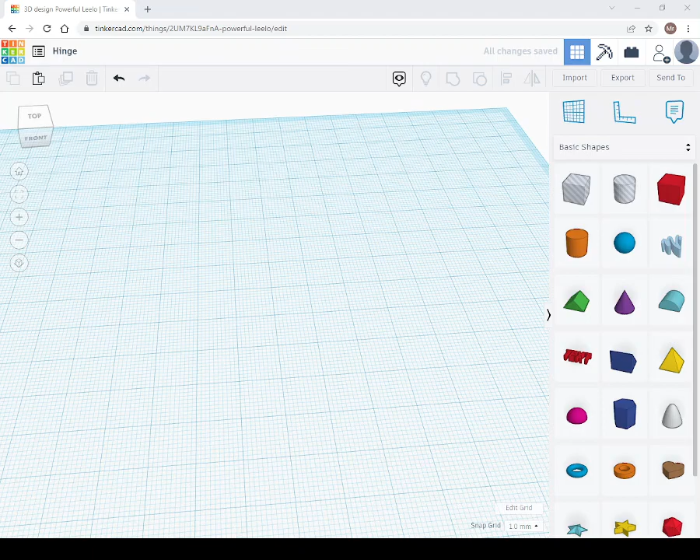Hi there, I'm going to quickly make a hinge mechanism. I haven't done this before, so it's going to be a bit of an adventure for me. I might come across some snags along the way, but we'll see how we do.

So I'm making the height 10, the length 10, the width 10, and I'm going to make this 30.

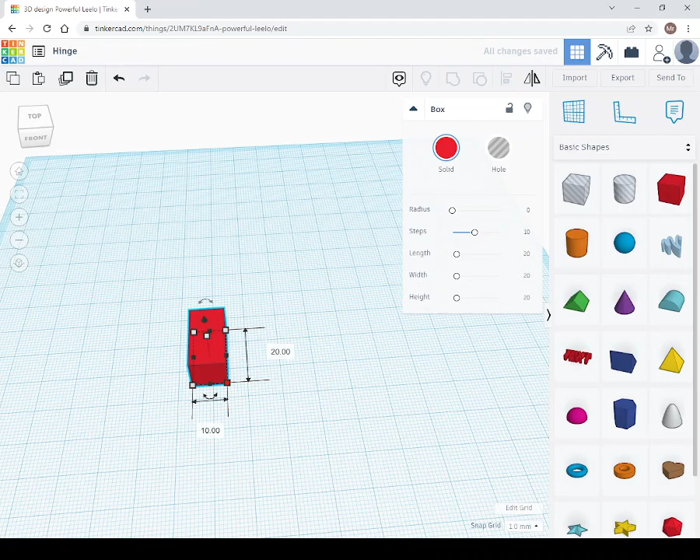Right, so for the barrel part of the hinge, I'm going to make this 30, same length. I'll make this 10 and 10, 10 and 10. Great, okay.

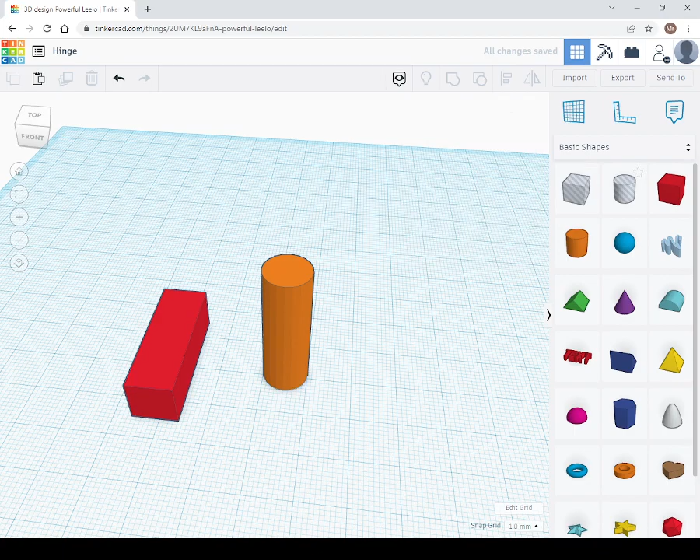Now I'm going to imagine that I've got a pin running through my barrel, which I can draw as well afterwards, but this is going to be 5 by 5, and I'm going to give it a height of 30 again, just to keep things nice and simple.

And what I might do is duplicate this and also have that as a solid, so I can have that as a pin.

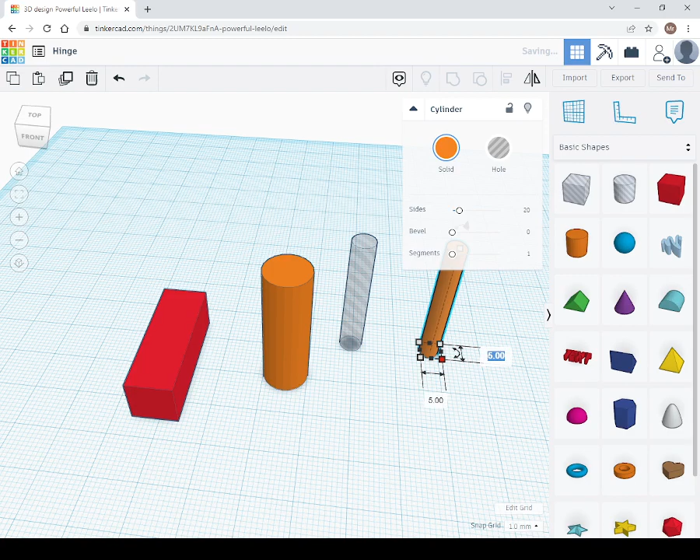Now, as it goes sometimes with the 3D printer, it's a good idea to have things slightly smaller if we do have a pin. I'm going to make that 4 by 4.

We can actually have a pin part that goes on the top. We'll make that also 2, let's see, we'll make that a height of 2. It just goes on the extra.

In actual fact, what we could do is make the height of this one sort of... no, that has to go through the whole thing, so we have to make it that way.

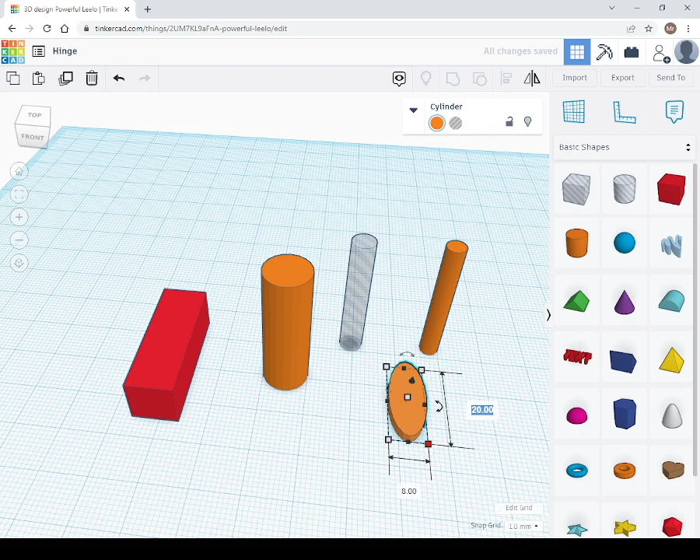I'm going to make this 8 by 8, so it would fit, but you can still see it's slightly smaller than the barrel.

I'm going to move up my pin by 2. There you go. And I'm going to take these both and align them using the align button, and group them, and that's my pin there.

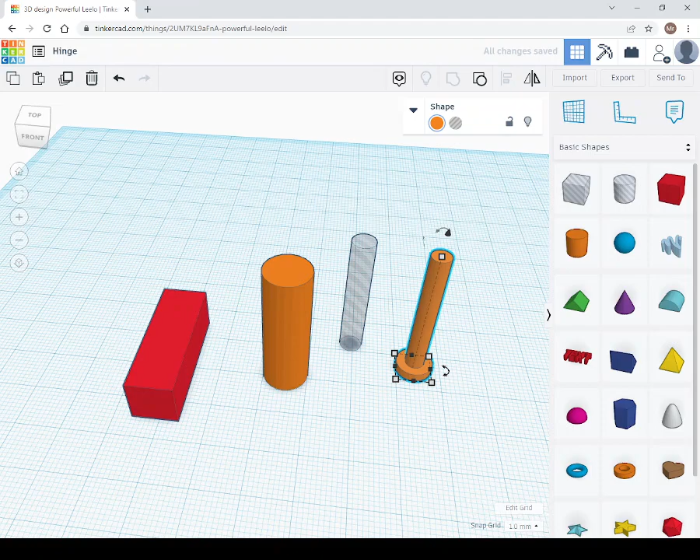So it's actually a little bit smaller than the hole. I'm going to go back to the barrel, and align them. Here we go, that's nicely aligned. I'm going to group them.

Group, okay good. And I'm also going to duplicate this because I'm going to need this. So let's just move this over here. This is kind of our little spare parts area.

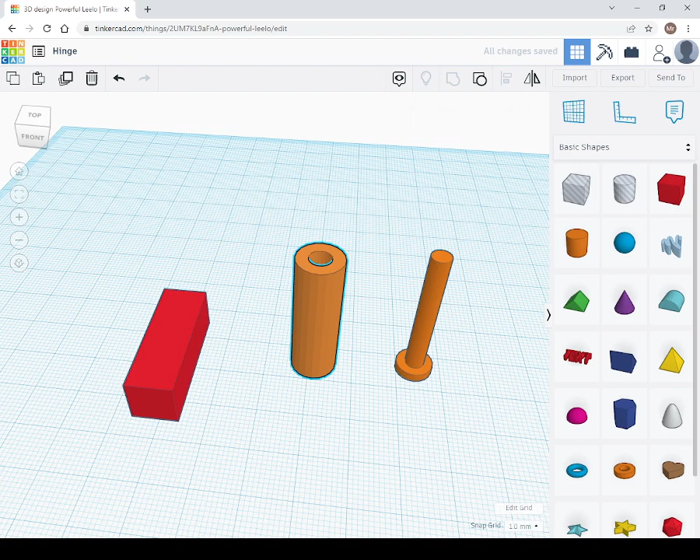Now what I'm going to do is, actually I think I'm going to turn it before I duplicate it. So I'm going to turn this 90 degrees. Let's give this a go. So that's the one I want, so I'm just putting the value.

I'm going to undo that and start again, I think. Let's turn that, well we can turn that like 90, and we'll just turn the other way, that's fine.

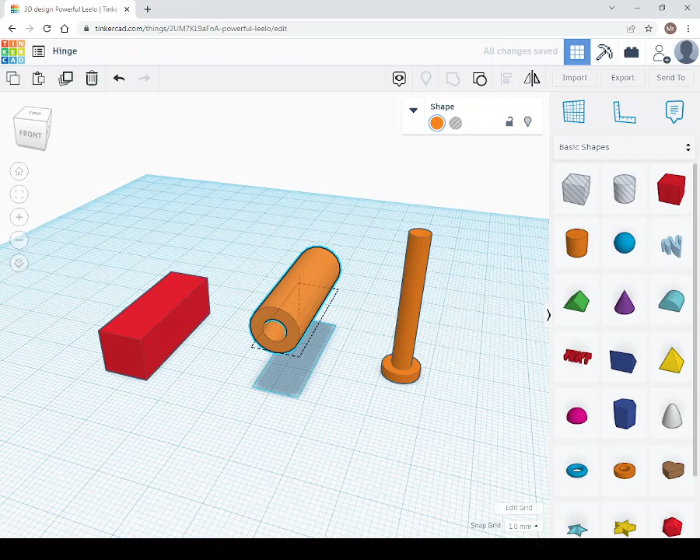So that's good, and let's align these two first. So we're going to make sure... oh actually, yeah, I want to align these first.

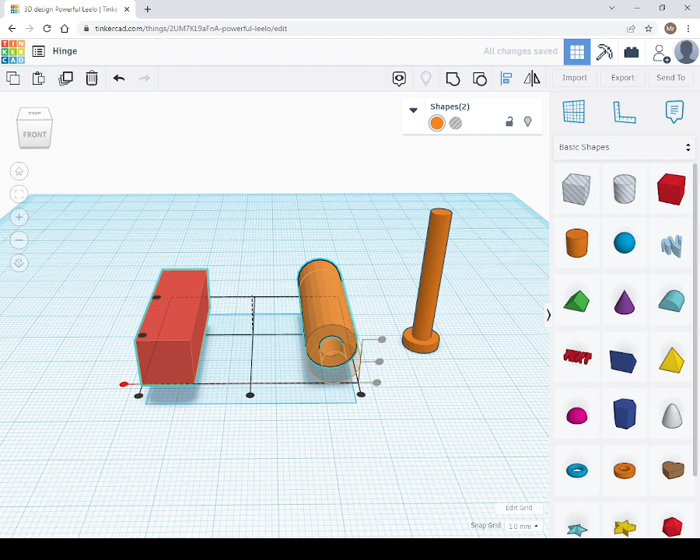I think what I'll do is duplicate the whole thing when I put it together. So let's just get them on the same plane, and get them to the same end, and center them. Okay, and I'm just going to move the whole thing down until it's to 0, so I want everything on the same plane.

And I'm going to take the block, and move it out using the arrow key, using the left arrow key. Keep going. Okay, yeah, I'm pretty happy with that. We'll leave it like that.

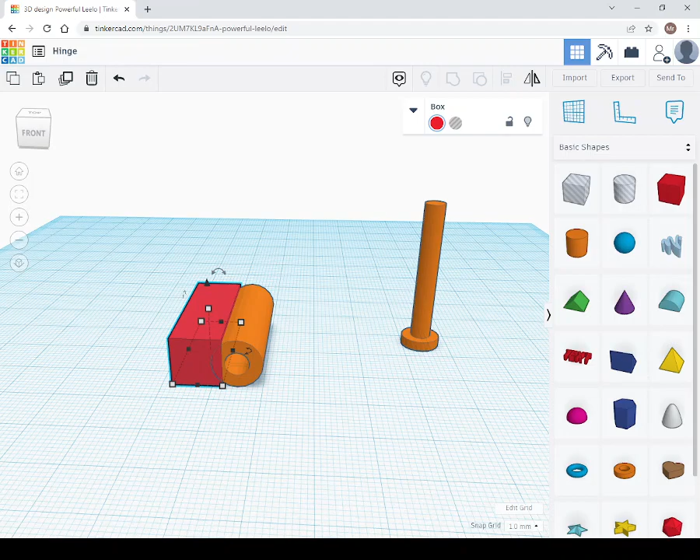And then what I'm going to do is, yeah, we can actually join these two together. But what I'm going to do with this is bring this down and make this 5. Okay, I prefer that actually.

I can play around with this a little bit more to make it a bit prettier, but I'm quite happy with that. So let's just have a look at our distances again, let's have a look.

The whole thing is, so when we group these, let's see what happens. We group these, what's it turn into? What's our distance? So that's 18. So I've moved it across, I've moved it across a little bit extra.

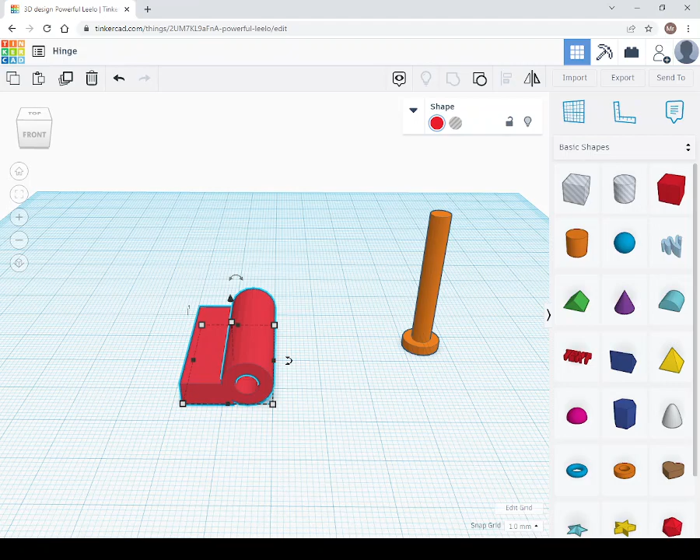So I'm just going to ungroup these, and what I'm going to do is take these two ungrouped and duplicate them. I'm going to move them over here, and use the mirror tool to mirror them. Okay, and you're going to see why I'm going to do this in a moment.

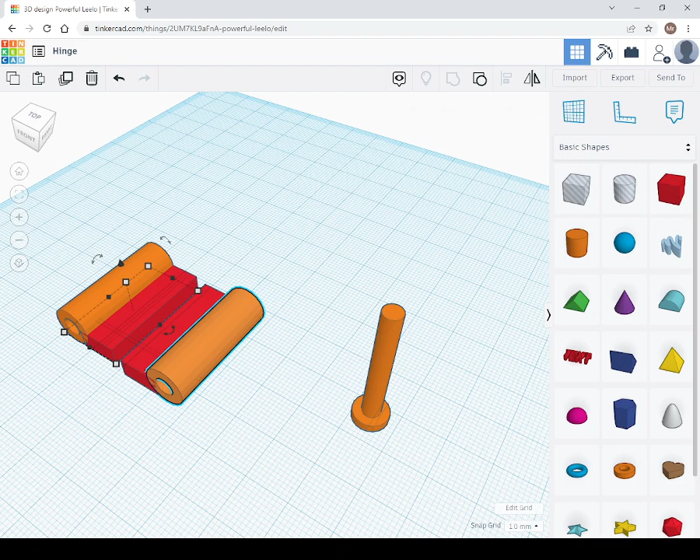Right, okay, so what I want to do with this now is make this a third of the size, so I'm going to make it 10.

Okay, and I'm going to very carefully duplicate this, and I can use the arrow buttons, but I'm actually going to use the shift button and drag this along. Okay, I'm going to drag this along, and I can put in the value of 20.

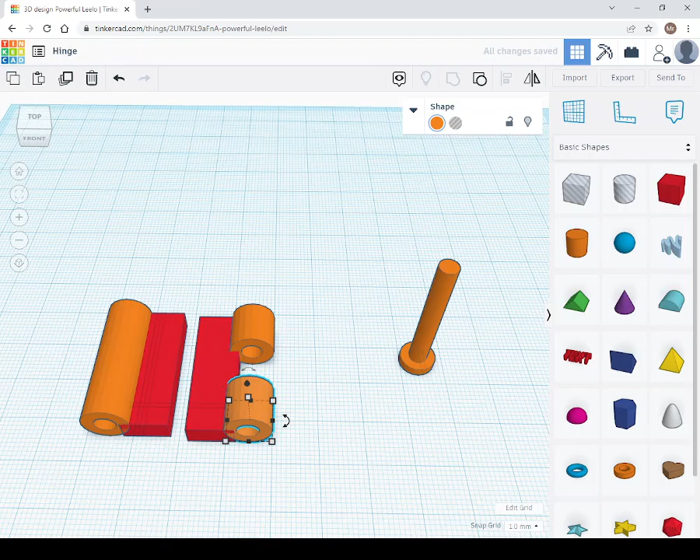And I'm happy with that. Okay, that's fine. Alright, good. Now,

just to make sure that we have a sort of freedom of movement, what I'm going to do is make the center barrel a little bit smaller than these two here. Okay, so what I'm going to do first here now is just select this all and group this. This bit here is done.

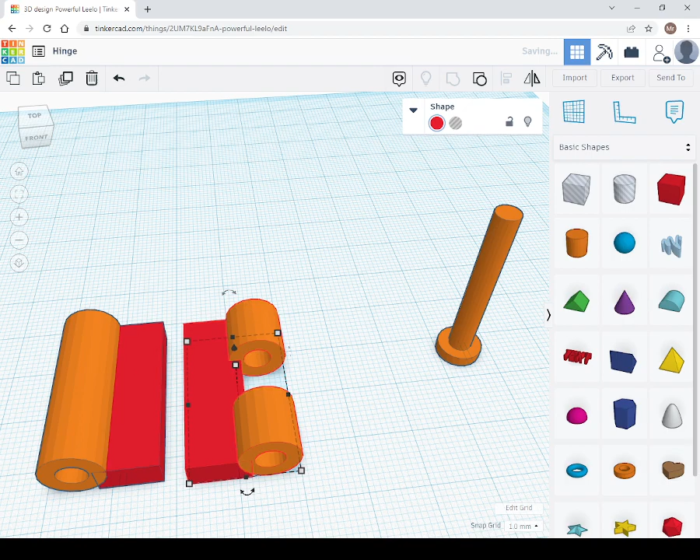Okay, it should all be grouped. I'll try that again, it should all go the same color. So I'm just wondering why that hasn't grouped. Something's going on with TinkerCAD. Yep, it's grouped, it's just kind of thinking about it.

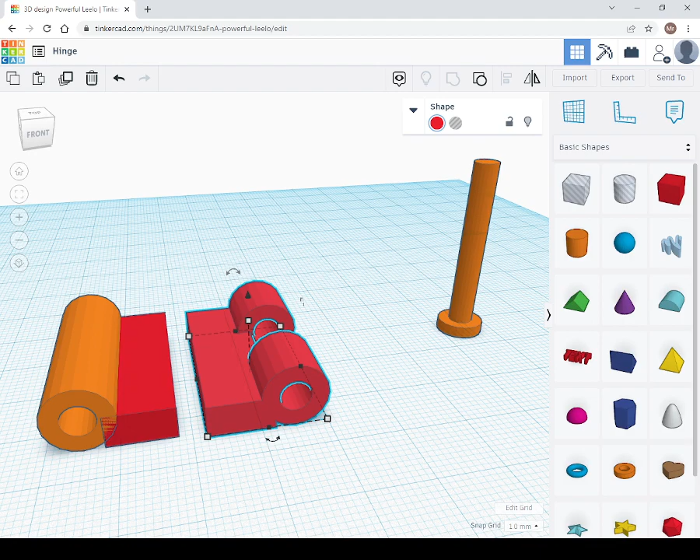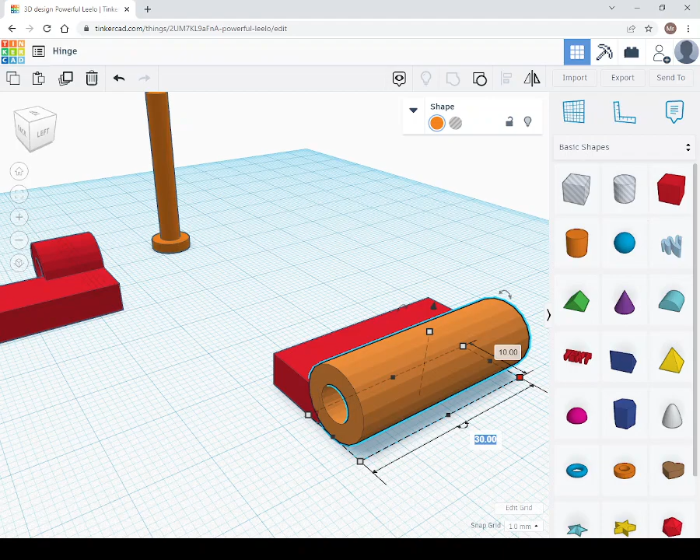So let's move that away. Now what I want to do is make sure this fits within my barrel. So what I'm going to do is make this 10 again. I'll make it 11 actually. And I'm going to play at this end, and make this also 11.

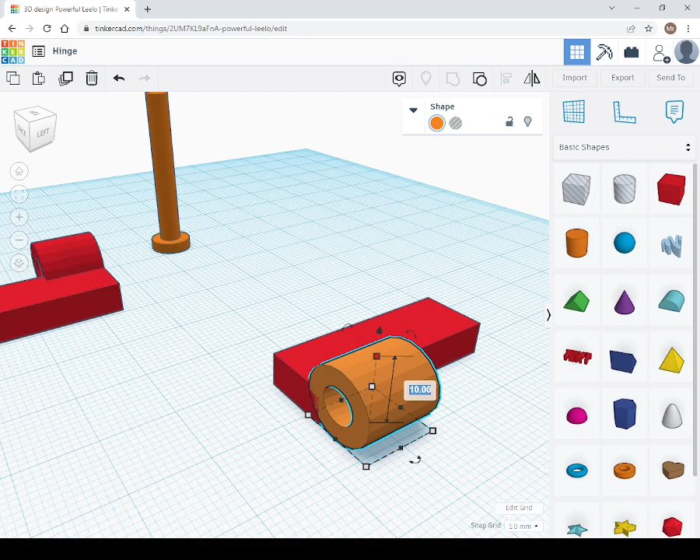Excuse me for that. Alright, and I'm going to make the height 11 as well. Okay, right, so what's this doing? This is actually making everything a little bit wider, because I'm going to turn this into a sort of a hole.

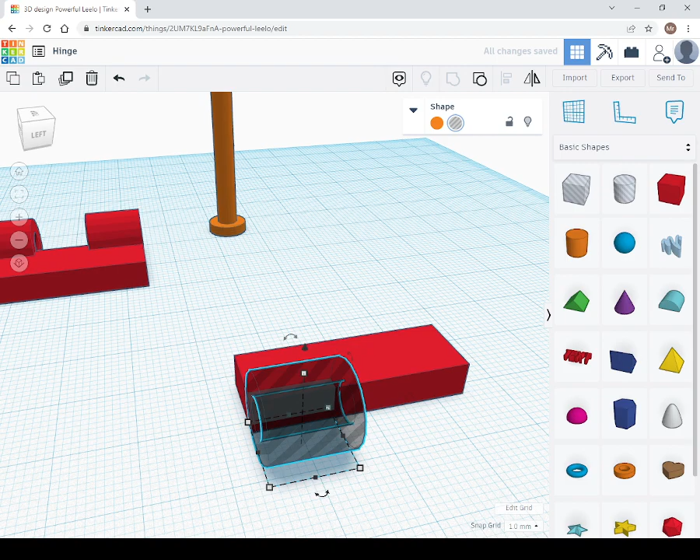Okay, great. Now I'm going to take this same shape and duplicate it, and move that to the end. I think I'll just use the shift button again. And let me see, it's going to be to the end, it's going to be what, 18? Is that right? No, it's going to be 19, because I'm missing -1 from my 20.

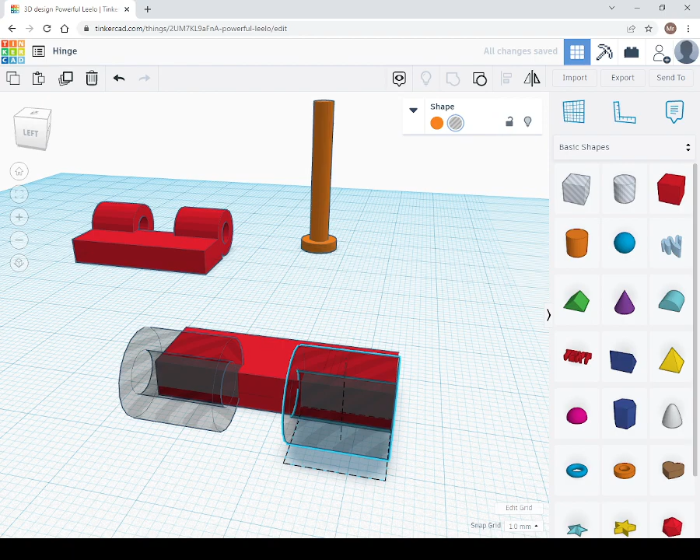So there we go, I think that's right. Okay, this is looking good so far. And what I'm going to do is duplicate it one last time. And I want to actually make it the way it was. So the first thing I'm going to do is make it a solid shape. Okay. And I'm going to make this a bit smaller.

So I'm going to make it 8. But before then I'm going to make that 10. Oh, I'm going to stop there for a minute. I want to make this 11. Leave it at 11 for a second. I'm going to duplicate this again, and I'll tell you why. I've forgotten to put the same sort of curve into the other one, so I'll come back to that one.

So now I'm going to make this 10. Yeah, I'm going to make this 10. No, actually, I'm not going to even worry about that. I'm going to make the top bit 10. Alright, okay, and that's all set.

Now what I want to do is move this back in, but I want to line everything up perfectly. This is tricky. So let's just group this first, and that's now kind of, let's just think about this. Can we just move this back in? Let's try it, let's just try centering them. So I'm going to take this one, press the shift button, and try to align these. See what happens.